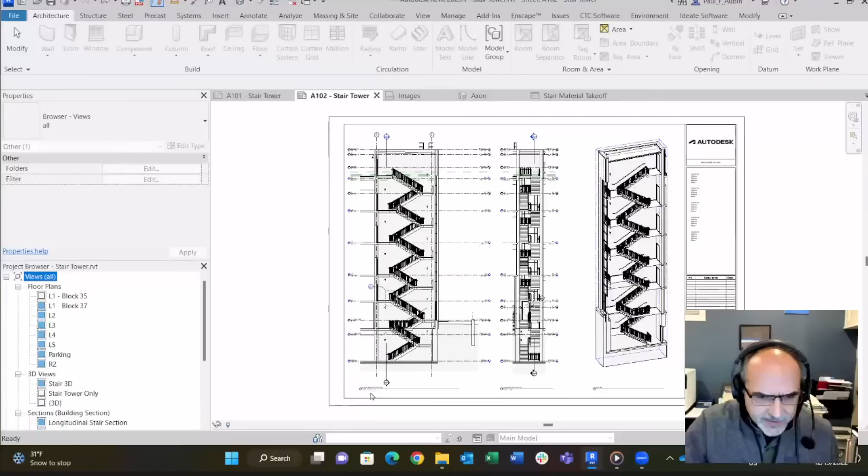Right now, we're looking at a sheet here that has, I don't remember what scale I set this at. It might be quarter. Yeah. Okay. So this is 1/4 inch. And I'm going to just zoom in a little bit here. Actually, let me do ZS. See if that works here. Because I already am in a sheet, right? Let's do it this way. Let me double click in the viewport. There we go. I was going to say, why is that not working?

Okay. So I know we're on the live stream, but on my screen anyway, that's to scale at 1/4 inch. And it should be telling you roughly what it would look like if we were looking at a PDF right now. What would be bold, what wouldn't be bold, what geometry you're going to see, what you're not going to see. Apologies for the hatch pattern on the concrete wall in the background there. I forgot to hide that. But actually that helps the stair stand out a little bit, so we'll just leave it.

But I think for this level of detail, for your overall floor plans, your overall sections, 1/4 inch, maybe even 1/2 inch scale, what you get out of this native stair tool with just a few clicks of the mouse, I think is fine. And I think in most cases is more than fine for construction document purposes, right? Here's the floor plans that go along with that. These are also at 1/4 inch scale, right? And I'll just kind of walk through them.

That's the lowest level, right? And then, going up to your first floor, your second floor, and it just sort of works its way up the building here, right? And then what you do in larger scales is you just draw a detail. Now, I hate to crush everybody and have everybody be all disappointed, but if you think you're going to click 4 times with the mouse, right? Because that's what it takes, right?

1, 2 for run 1, 2, 3, or 3, 4 for run 2. And if you think you're going to click the mouse 4 times and get shop drawings, then you've got the wrong expectation for stairs. So honestly, that's the lesson, right? In my experience, most people have this unreasonable expectation about what they're going to get from stairs for 4 clicks of the mouse, and they don't have that same expectation for other tools in Revit.

I don't know why we think that we're going to draw our walls or our doors or our roofs or really just about anything else, and have it be perfect and give us 1.5 inch and 3 inch to a foot details without a little bit of effort expended, and yet we somehow expect that out of stairs, right?

Now, this isn't to absolve Autodesk or Revit and to say stairs are perfect and there's nothing wrong with them. I'm not saying that. And railings especially. Railings definitely could use some love. Both of these tools could use some love. But having said that, is it perfect? Of course not. But if you have the right expectation going in, I believe you can get some pretty good results. And you won't have to make too many drastic compromises.

This is still a hybrid detail. I did not just throw the whole thing away and draw it all as drafting. If I click in here, this is the railing, right? That's a landing, so that's actually a floor slab. But somewhere back here is the stair. Where is it? There, right? These are the stairs. There's the stair. This one I covered up.

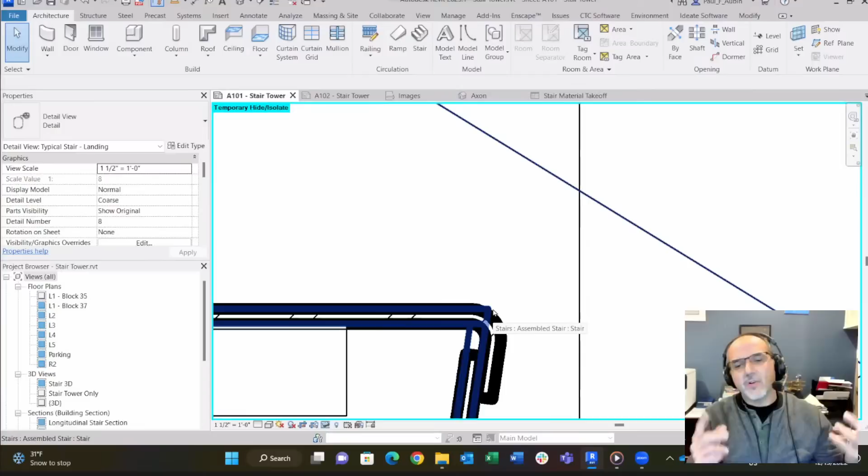Now, could I have done a custom profile? Yes. But you know what? I just didn't think it was worth it. You could make a custom profile for this nosing shape, and then you're going to really fight with it when they join together, because you'll get one part of it to look correct, maybe the nosing, but then the back part of the riser won't look correct, or vice versa.

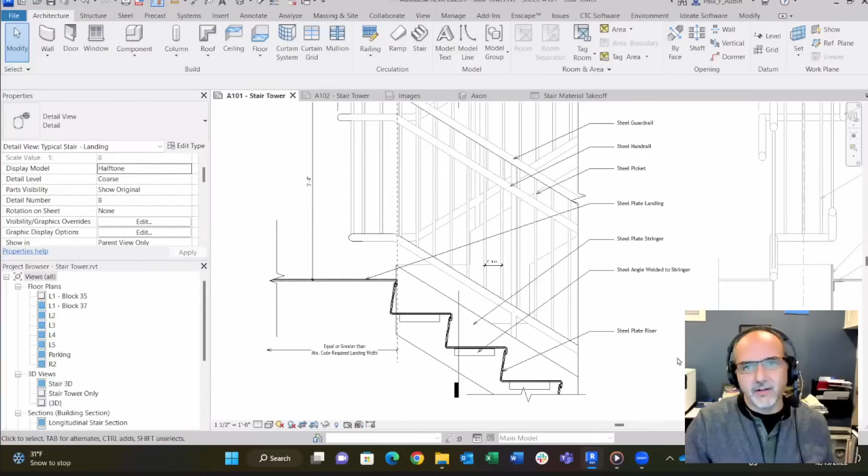So I just decided, it's one detail. This is a typical detail. It's one detail with an arrayed component, I said a repeating detail, but it's actually an array, sorry. And to me, production-wise, that was acceptable. Now, you might make a different calculus in your own work, but I wanted to show you the final result so you can see what's live. Another way we could do this is, over here for the model display, we could set it to halftone so you can see a pretty good amount of this is the live model.

But do you see here how some of the lines are dark? That's the line work tool, because when you have those rounded edges in 3D, they never render well in an elevation. But I was pleasantly surprised that I was able to just touch those edges with the line work tool and clean them up, and that worked just great. I didn't have to trace over them with separate lines. So the line work tool is a little nicer just because it's still the live geometry.

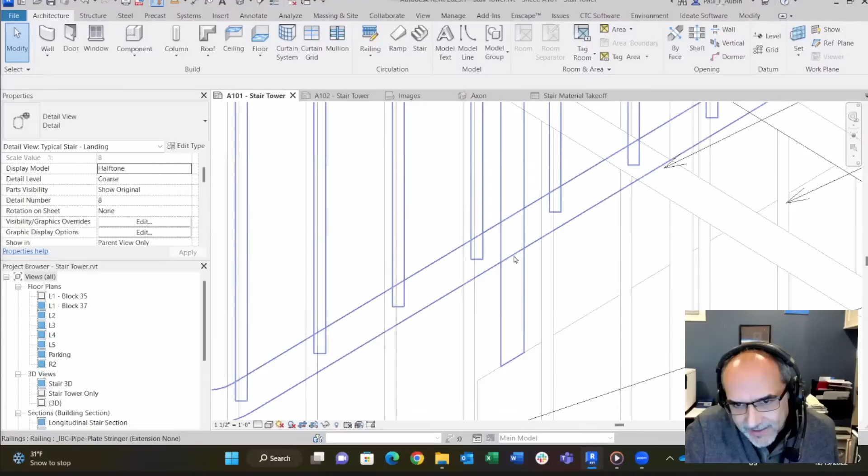You're just telling it to render differently. Here, right here, I'm getting this gap because railings don't do join geometry, right? So that looks like hell. That, unfortunately, you would just have to put some lines there if you wanted to take care of that. Some of that I just decided it's not bothering me enough to do that. But again, your results may vary. You might decide to do something a little bit different. But I just wanted to show you kind of a finished result.

Okay, this is all pushing the live stair as far as I think is practical, not possible. It's possible to push it further. What I'm calling practical, right? I'm trying to keep in mind that I don't want to spend my life building this stair.

I don't want it to take longer for me to build the stair in Revit than it would take to build it in real life, right? So I'm going to try and find a practical compromise between what the stairs do well and what they don't do well. And I think for figuring out how much room the stair takes, for figuring out the tread and riser ratios, for figuring out the special cases.

Like here, you can see in this one, there were two sort of first floors because at the street level there's a sloping condition. So this stair is in the middle of the building, about halfway up that difference in elevation. So you're actually entering the stair at one height over here, but to get out the exit door at the back of the building, you're at a different height. And so this stair is unique.

This one is unique. This is just a slab. Instead of using a landing or trying to do that with the landing tool, I just built it as a floor slab. And then this up here is a stair tower, because once you get above that level, the rest of it is pretty typical. And the floor to floor heights are largely the same. But even if they're not the same, that's the advantage of a stair tower, because it can regulate those different floor to floor heights.

So again, I was trying to leverage the tool for what it does well: the stair tower, navigating the different level heights. What it doesn't do so well, it's got some problems in the details, and it doesn't do the landings over on this side, which is really annoying. So all of these had to be floor slabs. I've tried to do a stair where you fake it out to get a landing in there, and I just don't like the results. So personally, I think just put a floor slab there.

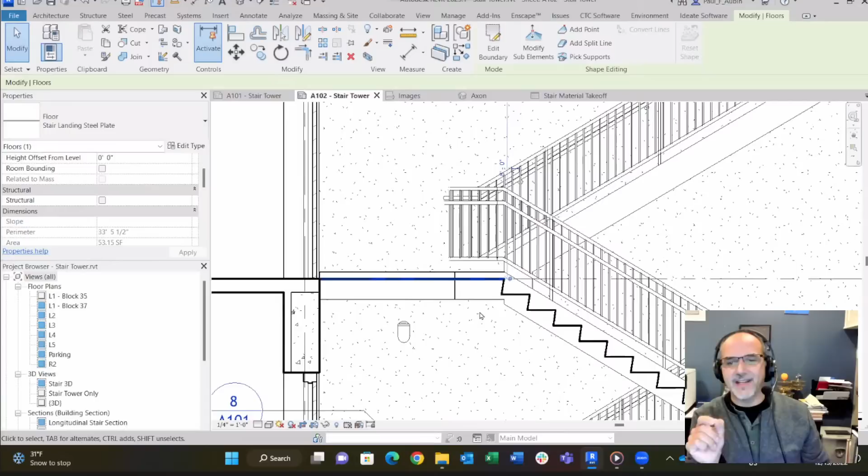Now, I was doing a metal plate floor slab in this project, but you could just as easily have a concrete floor slab there. And then, at an extreme, you might have to do something custom at that top riser. I've seen some details where the top riser is only like 2 inches deep, as opposed to a full 10 or 12 inches. In that case, the only way you're going to get the live stair to do that is to actually convert that run to a sketch, which is kind of a drag.

I really try and avoid converting the runs to a sketch if you can avoid it. I've got an example that I'm going to show you a little bit later, though, where I do convert it to a sketch because you have to. So if you need to, you need to, but it's not going to be as parametric when you do that. So I try and avoid that.

And I actually learned that by accident, because a client sent me a stair and said, I can't figure out what's going on here. How did he do this, and blah, blah, blah. And then I looked at it and I was like, oh, they converted this to a sketch. And then I realized why.

They had a concrete slab, and they just wanted a little 2-inch nosing for that first top riser, and then the regular risers from there. And to get that little 2-inch nosing at the top, if you convert it to a sketch, you could just move that one riser line and it's done. So I was like, oh, that's pretty clever, except that it's now a sketch-based stair, which I didn't love, but it got the job done.

So let me take a breath there for a minute and see if there's anything in particular you want me to dive into, or any questions. No, definitely. I think there are a couple questions, but as you're going through building this stair and showing some aspects of how you built it, I think you'll answer a lot of those. So we don't have to dive into those.

I just wanted to reiterate, because I think it's an interesting point that you mentioned there, of setting expectations for the stair tool, and for what you can and can't do with it effectively, or practically or efficiently, whatever word you want to use there.

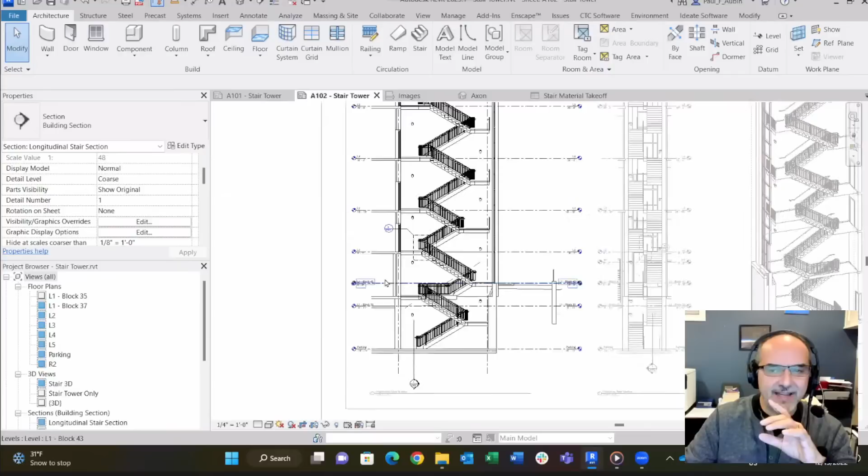I did the detailing too late. I would recommend you do it earlier than I did, almost right away, because when I started working on this detail I discovered I've got my railings a little bit wrong. This would come down and weld to the outside of this plate most likely, and I have it centered on the middle of the stringer, and that's kind of a problem. At this stage of the project, to go back and fix the model now, I toyed with fudging the detail. I decided to leave it for now because there's another pass, but it's an issue.

And what it left me with was a great lesson to share with the group: don't wait too long to do your detail. If you're doing a hybrid detail especially, you can start laying those out early. The second there's an element there, you could at least put a view, a section cut, a callout, and have it there. Yeah. And it starts to convey that information.

It makes you realize, oh crap, I got to go back and address that. Something is not right there. There's so many things for us to keep track of in a typical project that you just can't keep track of it all. So that's why make as many views as you can and have them ready to go so that you start to discover these things sooner rather than later.

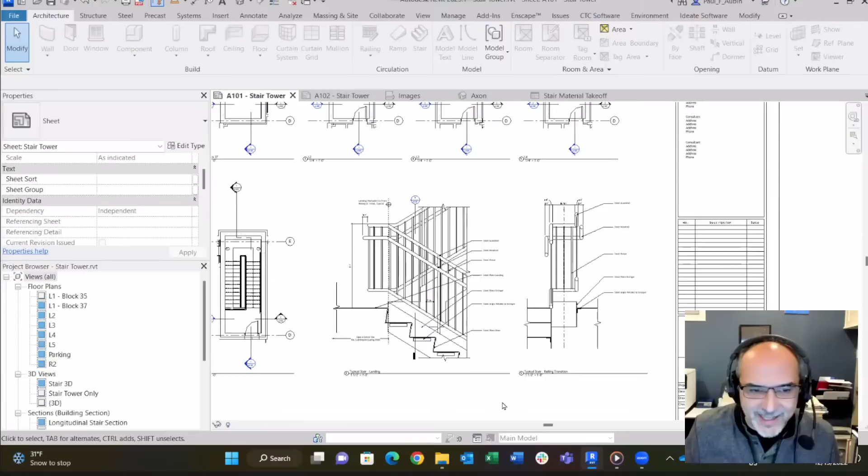So anyway, I decided before somebody in the chat says, hey, his railings aren't right, how are you going to weld that thing? Yeah, I'm gonna just come clean and say, yeah, I know, and I discovered it too late, and it needs to be fixed, but maybe later, right? Awesome. So anyway, let me show you a little bit about this stair type then.

So I've actually got a view here where I just isolated just the stair, right? And I didn't do anything fancy with this. I just literally selected the geometry and then hid everything else, right? So this view is purely for the purpose of showing you just the stair itself without any of the surrounding architecture. And I'm going to start with the one down at the bottom because it's not part of a stair tower, so it's easy for me to just grab it.

And this is called metal plate stringer, right? Pretty common egress type stair. And I tried to keep it as simple as possible in the type. I don't want to get super carried away with this stuff, right? So if you compare this to, I'm sure a lot of your viewers are familiar with the settings in a typical, like the 7x11 or whatever. Yeah, the typical 7x11 that's here. I didn't change anything there, right? So it's really here in the run type where there's some changes.

And then, I try and change the names. So prefix underscore is helping me identify in a long list of stairs. This one, it kind of bubbles to the top. So that's the only reason I did that. But if we edit this, this 1/4-inch tread, 1-inch nosing riser one, right? There's not really anything different here.

I think the only thing that's different from the out of the box is I changed it to a slanted riser because the out of the box one, this is unchecked, and then there's a profile, and I just took the profile off. Because you're going to get that sharp corner. Okay. They don't have a fillet option here. It'd be nice if they did, right? Like they have that in railings. Right. They don't have it in the stairs, right? So if we could just automatically make it fillet.

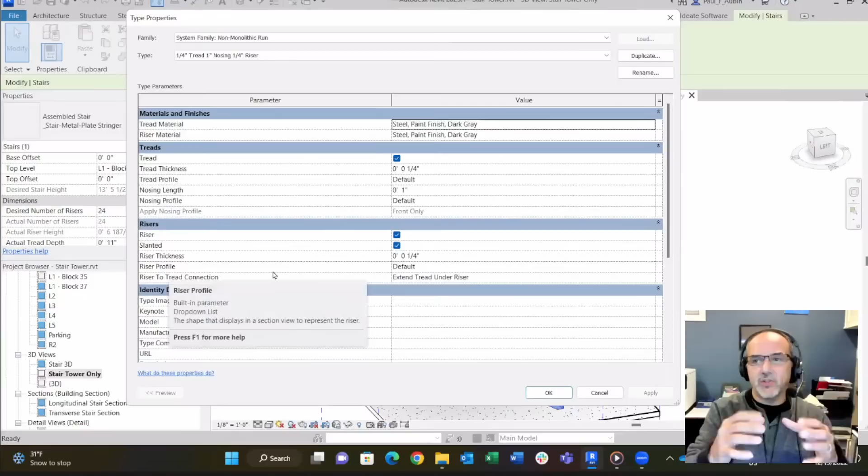But again, like I said, you might make a different calculus. So for those that want to explore, that's what you might want to look into is the tread profile, the nosing profile, the riser profile. Those might get you closer to the detail. But otherwise, all I did here was rely strictly on the materials.

It's 1/4-inch in both directions, and it comes at that sharp point, which is perfect for 1/8 inch, 1/2 inch, 1/4 inch, maybe even 1 inch to a foot. You probably wouldn't start to notice. It's only when you start getting into the large scale details that you would notice. And that's when you just add the detail component, in my opinion. So that's all that's going on for the run type.

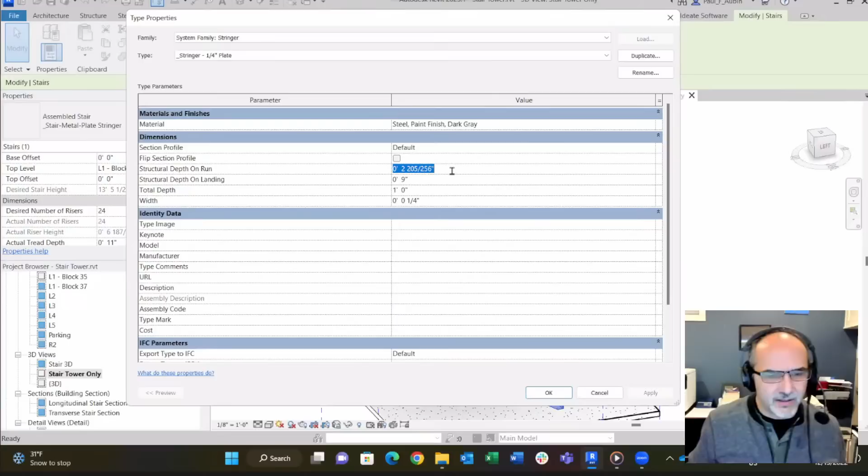For the supports, it's pretty straightforward because it's just a plate stringer, which means that the material again is just 1/4-inch material. I mean, there's really nothing to it, right? I don't really remember where this number came from, so I don't know if that was auto-calculated or if I did that, but I really don't remember. So I'm just going to leave it alone for now. And of course, I added some materials.

But that's it. That's the stair type. I mean, the stair type is super simple. Where a lot of the work really was in this particular content is the railing. Because to get railings, and it's really the extensions on the railing.

Let me see if I can find a good example here. Right here, right? Do you see how it... I know everybody was hoping I'd have some magic way to make it go around the corner. Sorry, I don't. This is a separate railing, right? I just deleted that. I'm going to undo. So I literally just drew a separate railing.

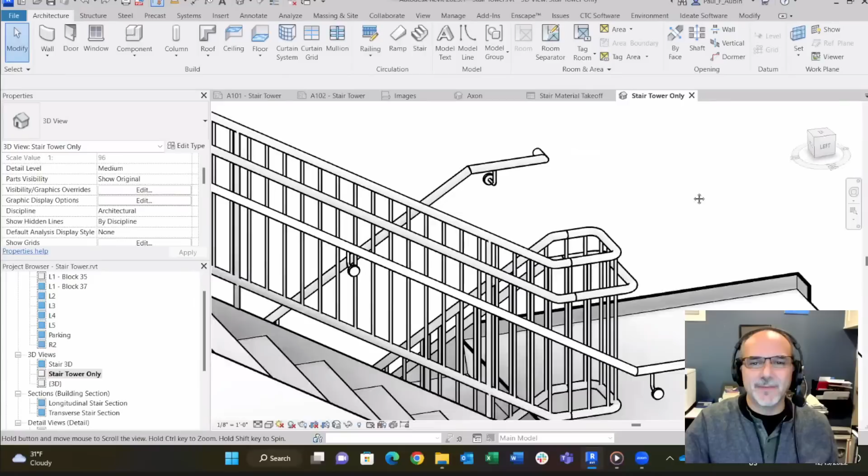Now, anybody who's heard me talk before knows I hate seams. Yep. So this seam does bother me. Yes, it really does. But compared to the agony that I would have to go through to try and do that as one continuous railing, I got over it. The other thing you might notice about this railing is I've got very few posts, because the minute you introduce posts into here, it starts becoming kind of painful.

So I decided I could live without the posts for my 1/8, 1/4, and even 1/2 inch scale views. And views that really needed to see the posts were probably zoomed in closer, which means I'm only adding 1 or 2 manually. You're not adding posts down the entire railing, right?

Now, some might say, well, what about Enscape? Well, if you're doing Enscape at your fire stairs, then maybe you need to go introduce your posts, right? And I do have a couple. You see, there are some here. But I'm not getting them in these areas here, because trying to get the railing to do it automatically was just becoming too painful. They do have corner posts, but it kind of messes up other things.

And so that was the decision I made: given what I was able to do without posts versus with posts, I decided to really dial back the posts. So I've only got the most basic ones. I've got one right there, right there, and right there. And I decided not to do posts around where it turns the corner. Again, your results may vary.

But to get vertical members like the IBC code calls for along your extension, that's not really a great example. Where's a better example? Probably at the top. Those have to be supports. Where is a good example? Well, okay, there is a little bit right here. You are seeing it right there, right? If those were balusters, they would stop here at this one.

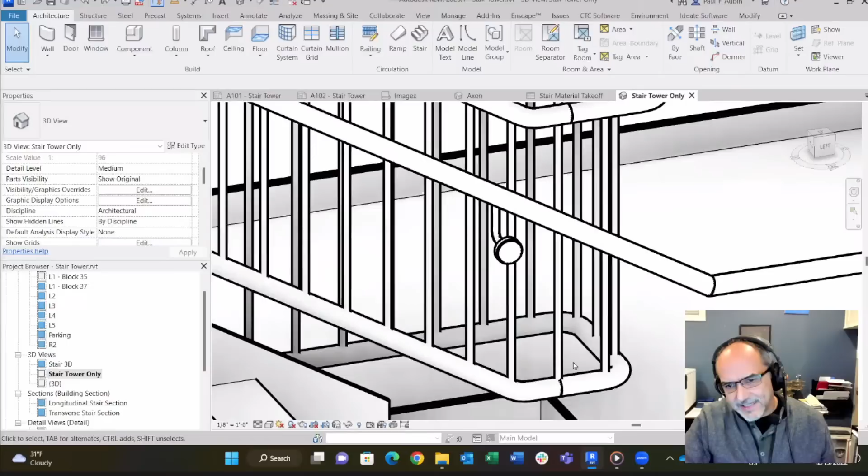To get it to go to this one, this is actually a support. And you see the little push pin here, right? That's a separate element. Supports only work on top rails and handrails. So if I look at this railing type, there is a top rail that I called IBC circular. Again, the underscore, that's my naming. That's my topmost rail up here at the very top.

Then I'm using 2 handrails, one for the actual handrail that you grab onto, that's a proper handrail, the other one for the bottom rail, this guy down here. This is actually a handrail. So this is a handrail, and this is a handrail.

Sorry, I don't have one of those highlighters. Zoom has that, right? I think so, but that's okay. I could do it for you too if you want.

Yeah. Okay. So this is a handrail, and this is a handrail. And this is a top rail. So that one is T for top, and this is handrail, right?

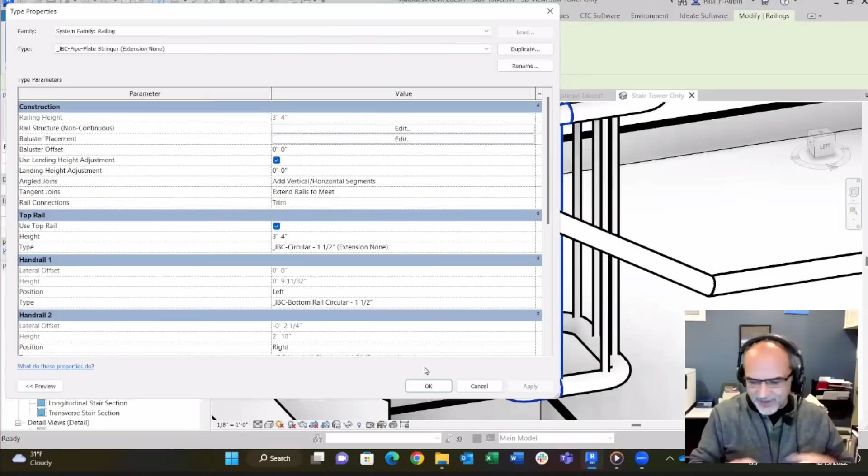Yep. Now I got to figure out how to erase all of that. I can't tell you how. It's somewhere on the Zoom controls. They're all drawings, and they go back to the mouse. Yeah. All right, let me close that. So, my good friend Nahama from Arc Intelligence has this little tool, I think it's called ZoomIt. I downloaded and installed it, and she's so good at the keyboard shortcuts for pointing to things. I'm just terrible at it. I can't remember the right shortcuts. By the time I find them, I make a mess of things, but I'm always jealous of her when she's presenting. But anyway, I digress.

So here, this one is set to left, this one's set to right. Okay, and that's how you can get this to work, because you can have 2 handrails, and what it was intended for is one on the left and one on the right. But you can take one of those and just pull the offset off of it and move it vertically, and it's basically in the center.

I forget which one of these. This one, I guess, right? My handrail 1 says 0 for the lateral offset. That's my bottom rail. So even though it's technically in the left position, it's 0 offset. So it's sitting right at the middle of the railing. And then the right railing, the one that's actually set to the right position, has the 2 1/4 inch handrail offset. And that's the one that's placed, you can see here the height, at 2'10", right?

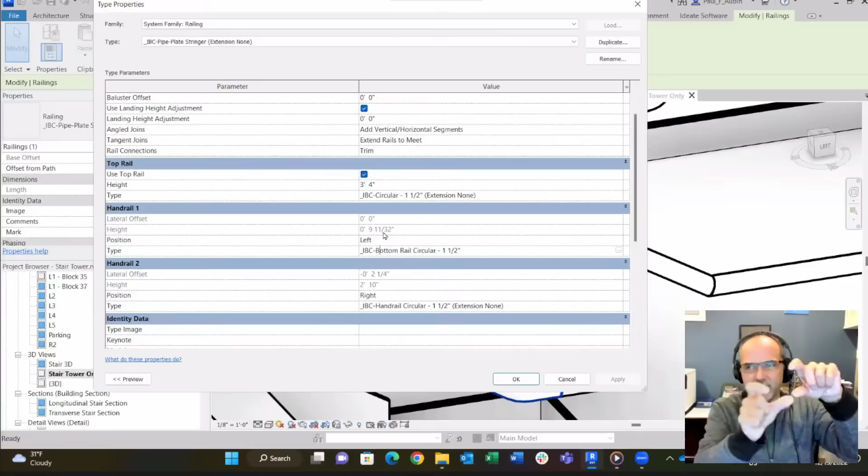Now, the height of the bottom rail, I just got it as close as I could to what the code called for. It's just a lot of trial and error to get it, because the way the code measures it and the way that Revit measures it aren't quite the same. So I got it as close as I could. And again, when you're placing your dimensions in your detail, you're going to verify those things and make sure they actually match the code. And if they don't, then that's when it might be time to either edit your type or fudge your dimensions, right? Anyway, that's what I'm using here.

So otherwise, the rails themselves are super simple. Now, I don't remember which one of these has the supports. I think it's the bottom rail. So, yes. So there's the pickets right there. And all that is a family that is just a circle extruded, right? I don't remember if I did it as a sweep or extrusion. I tend to use sweeps so that I can edit the profile. And then, of course, the spacing is 4 inches to match code. But the nice thing about doing it with a support is the pickets continue through the extensions, right?

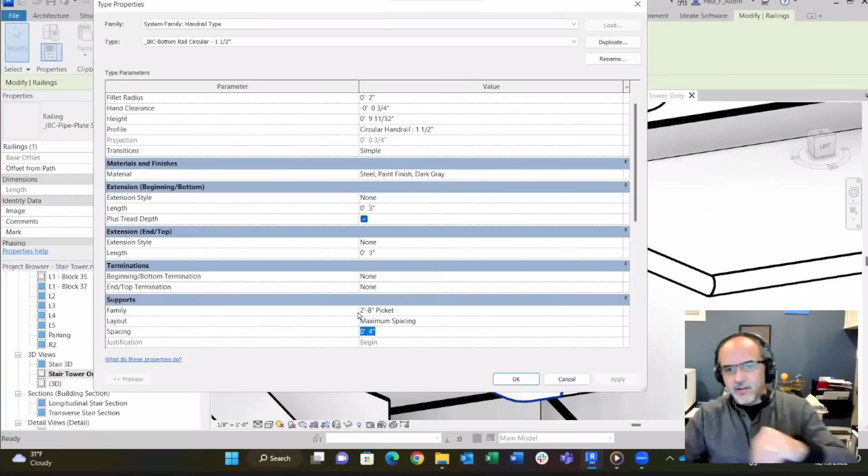Now here I'm only extending 3 inches, and that was just because I was going to draw that extra piece manually. But like this handrail here, that one actually extends the full amount plus a tread, so the more traditional thing that you would do, right? But here I'm kind of doing it manually. And I forget how I arrived at 3.

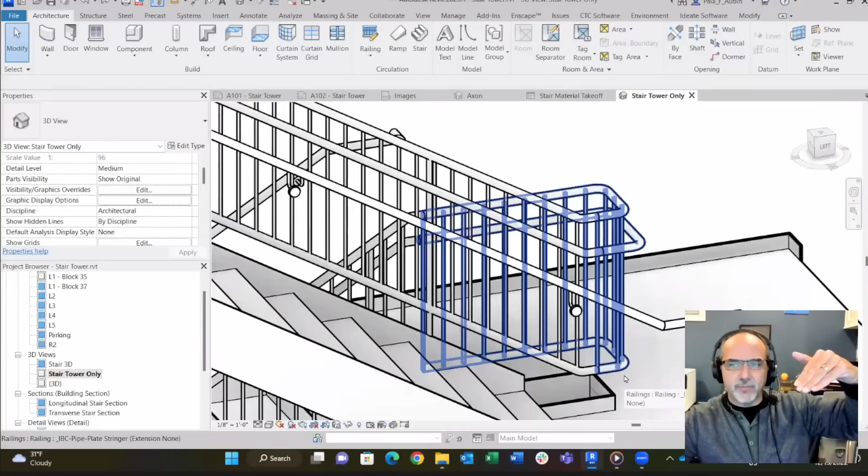It was, again, some trial and error, because if you didn't extend it at least a little bit, then it doesn't flatten out. And I think because 2.5 was my minimum, 3 inches got me past the minimum and it flattened out properly. Otherwise, it just kept going at the same angle. And I wanted it to go at an angle and then flatten out. And the only way I could do that is to let it extend some. So that's where the 3 inches comes from.

No, that's awesome. So your balusters for the stairs are all supports, right? All of them except for these posts. The posts, then the balusters in between. And in order to make that happen, you have to do that handrail trick you're talking about, right? That's part of the reason why you're explaining handrail 1, handrail 2, because otherwise the supports wouldn't work the way that you're thinking, which is kind of neat. That's really cool. And that's just so that the baluster with the extensions is controlled better, right?

And I think a lot of people struggle with that, because the code calls for that. The code says you have to continue those vertical members along the extension. And when you use just the out of the box baluster and rail tool, when you pull those extensions, just the railing extends and it stops the baluster. And then you're always trying to figure out how to meet that gap, sometimes splitting the railing, doing all kinds of stuff to try and get that to work. So that's really neat.

I wanted to reiterate that just so everyone followed why you ran through that, because the support tool, which I believe was designed for the wall supports, wasn't designed for these things. Yes. So you're taking advantage of that tool and not dealing with the damn baluster spacing. Actually, I think these ended up being the out of the box ones, not mine. So mine are slightly different. Let me see.

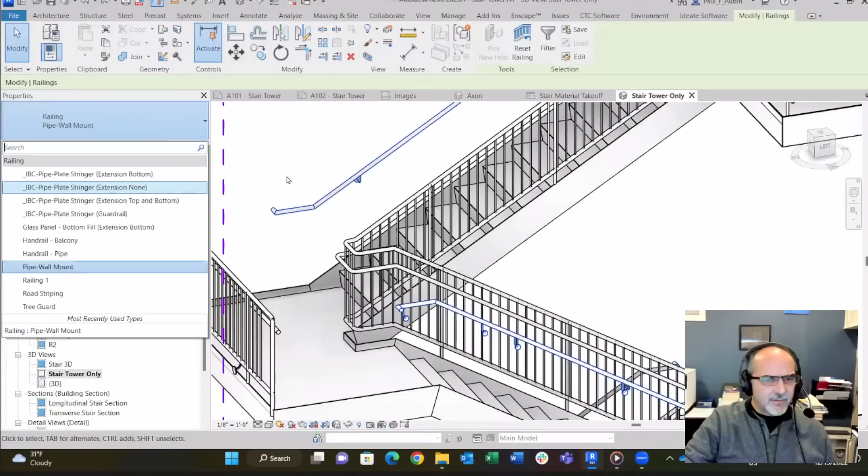Maybe I didn't load them in. Mine were slightly different because I like the smooth, right? So when you're in a railing, there's a setting for that. It's buried somewhere. Let's see if I can remember where it is. It's probably in here, right? The default join can either be a miter or fillet. Right. Fillet, and then you can put a radius.

And it just makes smoother geometry. Again, I like fewer seams. I like smoother geometry. So you see how it's doing nice smooth and going around the corners here. And that's part of the reason why I needed the 3-inch extension down there, right? To get past that fillet. And then this one, the same thing with the wall return. It would do a nice fillet there if you use that.

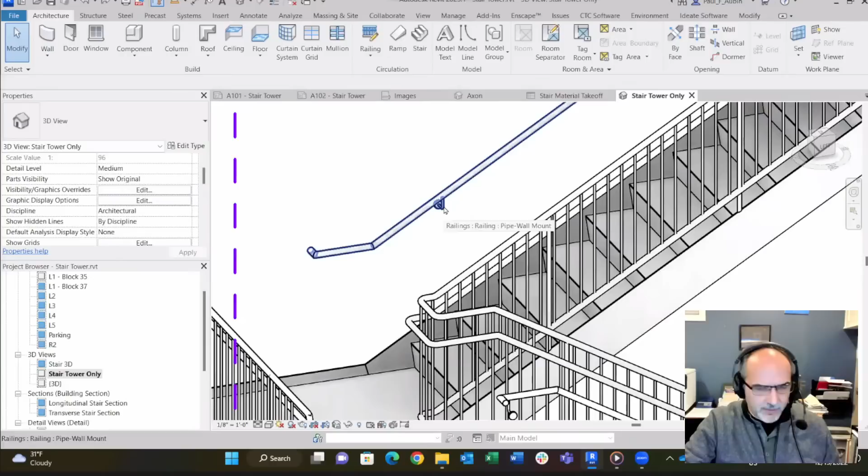So this is theirs, I think, because those aren't supports. That's actually a baluster, I believe. So that's like the old school one. That's snuck in there somehow. No, maybe not. Oh, hold on. Maybe you just couldn't select it for some reason. Yeah, maybe it's just not letting me select. Oh, yeah, no, it is a support. Yep. Okay, so there it is. So yeah, that's traditionally how you would use the supports.

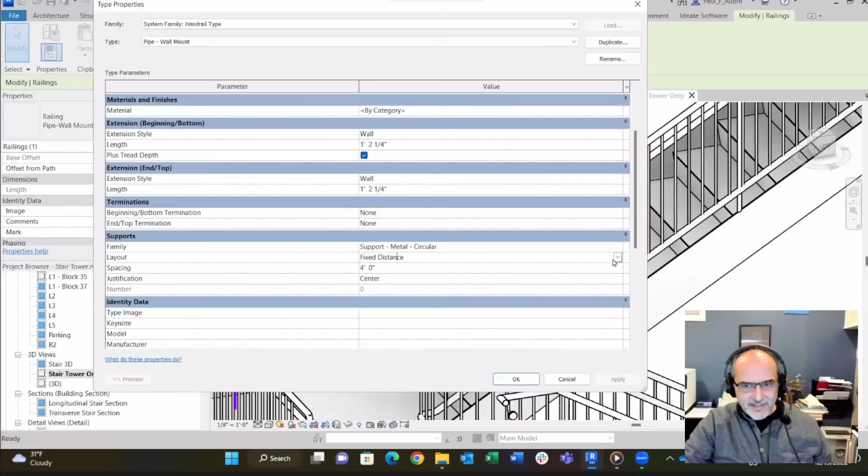Right. Is to either attach to the posts, because there is actually a setting in there which is kind of nice. Like if you want that same kind of little escutcheon plate and angled support to attach back to the posts on your railing, then one of the choices here is to do that. So the fixed distance is one of the options, but you can say align with posts, right? Yep. So if you align with posts, it'll just put one at every post, which is kind of nice on a stair. But then it doesn't know what to do along the extensions, right?

And then these things, you always end up with these in kind of weird, bad places. And sometimes you can select them and unpin them, but sometimes the push pin is mysteriously not there. I think it's because this is in a stair tower. Yeah. Right? And when it's in a stair tower, it just doesn't behave. So down here, right, I should be able to unpin. See? So I could unpin that, and I could actually move that support, which is not great, but it's better than leaving it in a really bad spot, right?

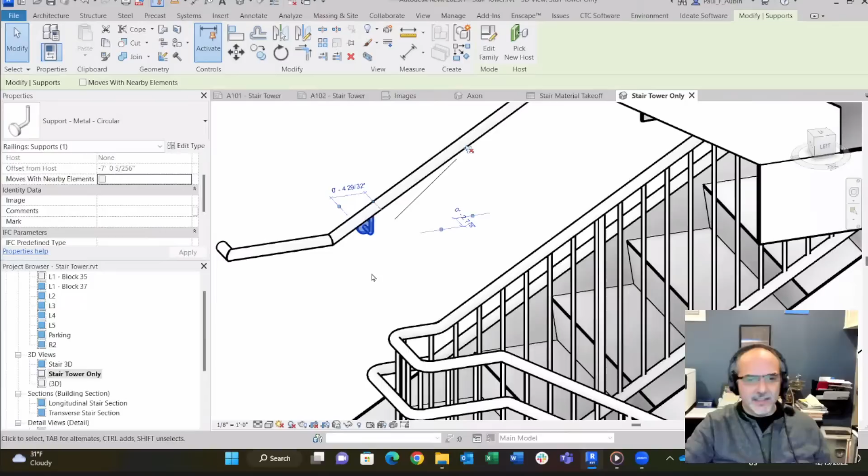So if I want one of these here, what's not great about it is having to do that over and over again in lots of places. But the fact that you can do that, you can even go to the component tool and you can add a support, a custom one, which is another really nice feature of supports. You can't add a baluster manually. Right. But you can add a support manually. But again, stair towers seem to break all of that, so again, we're talking about the good and the bad here.

So there are some legit complaints of stuff that just does not work in stairs and railings, and that's definitely one of them. So some of those things, like I said, you just got to temper your expectations and work with what does work and just kind of try and live with what doesn't. So now you've got that, that's great, and I think even just that railing setup will be a huge eye opener for people.

So maybe show everyone what that looks like before you fix some of the end rails and stuff. Maybe just draw a quick stair, just so... I'm sure everyone's dying to see that. But I'm curious because now with this sort of extension or this handrail 1 and 2 approach with the supports, I'm curious to see how it pans out too, because it makes total sense in my mind, which is awesome. I need to figure out where you're gonna draw it. Yeah, I gotta find a plan here. All right, so let me

just make a new... And Michael in the chat said, to get posts where you want them, you can split the line, add a reference line, align lock the ends of the path to the reference lines, and dimension to the reference lines. Yes, right. That's exactly what I'm saying. We don't want to do, and this is what it's helping you.

But without supports, that's what you do, right? In order to try and get that baluster to end at the end there, right? But his comment is great, because you and I are saying, we don't want to do that if we can avoid it, right? But sometimes you can't. Yes, sometimes you can't. Sometimes the project calls for it. You need that level of precision in there for XYZ reason, right?

And again, when you're balancing, like I wish I had a pair of scales here so I could just use it as a prop. But when you're weighing the pros and cons, if I do it this way versus if I do it this way, you should always be asking yourself, am I going to get more benefit out of this than the amount of effort I'm going to put into it? Right. And if not, then you should step back and say, well, maybe I shouldn't do it that way. Right. That's all I'm saying. I'm not saying that anybody's doing it wrong if they do more detail.

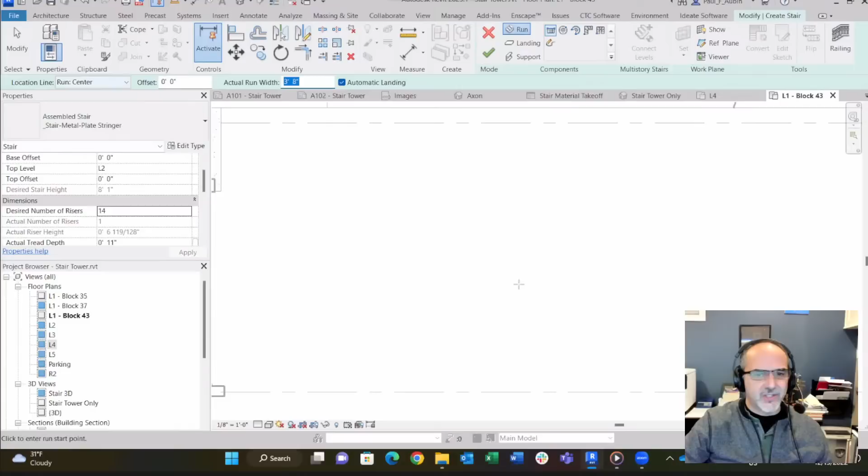Run width 3'8". That's fine. That's typical. I'll just draw it from the center because I'm off to the side in empty space here, right? I'll do about half of it. Let's see, 7, and then we'll do the other half, right? Now, if you just do this, of course, I'd have to have thin lines to see because that's only a 1/4 inch thick, right? So if I just did this, I'm going to get the really nasty kind of tight railings.

Anybody who knows me and saw me just cancel now. I'm doing a demo. I'm not doing a real project. No, because I always give people a hard time about that. Yeah, of course. Click cancel, right? So I know somebody's there saying, "Hey, he just canceled." Right. Yes, I did because I don't want to save this on purpose.

I'm gonna overtake my 3D view here with this guy, and we can just kind of see what this looks like. All right. So I have it default to this crappy railing, right? Because I find the one downside of using supports is sometimes when you switch railings, the supports misbehave. So I always like to have this railing that's nothing but a rectangular handrail in the file because it's almost like a reset. In fact, that's probably what I should call it. I call it Railing Reset 1, but I should just call it reset.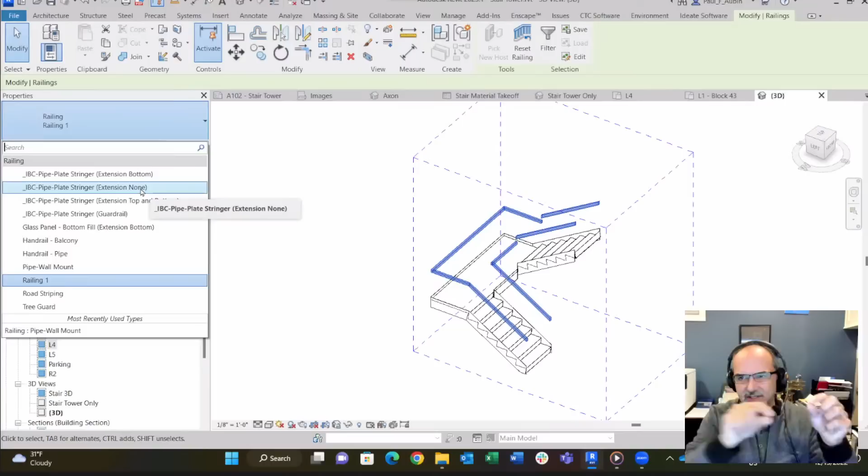I don't know why that works. But like if you try and switch from, say, a glass panel railing to one that's using the pickets, the pickets will almost always misbehave. But if you go to this one first and then to the pickets, it seems to work fine. I don't know why. I really couldn't tell you, but it's just one of those weird little things. So I've got actually different versions. The one that I was showing you in the other one, I think was using extension. I called it none, but really it's just that little 3-inch extension. Right. I'm going to do the top and bottom one just to show you what it looks like if you just had a 1-story stair here, right?

That warning was telling me I had duplicate elements because sometimes it'll put an extra picket somewhere right on top of another one. So I just ignored that. Ideally for a clean model, you'd want to get rid of those duplicates, and you can actually tab in and find them and delete them. But I just ignored it for now. But they're usually right here. Like there's one right there, kind of buried in there, and there's another one right there.

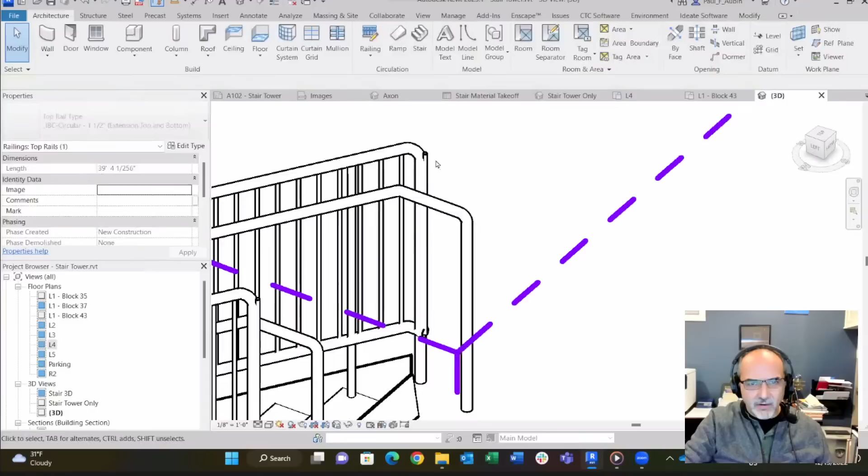There's one right there that's a problem, right? So if I tab into that, unpin it, you can just delete it. Which you can't do with balusters. Can't do that with balusters, yeah. So that's a bonus to supports there for sure. Yeah, it's a lot of bonuses to supports, right?

But you can see that mine is using the rounded. I just like the rounded better. But do you see how kind of crappy it looks right here, right? So usually for me, unless you're modeling an existing stair and this is what it is, it is what it is, right? For these really tight, crazy angles, you're going to have very little control over that with the default railing tool. So that's a place where it's doing its level best here to try and give me what it thinks I want.

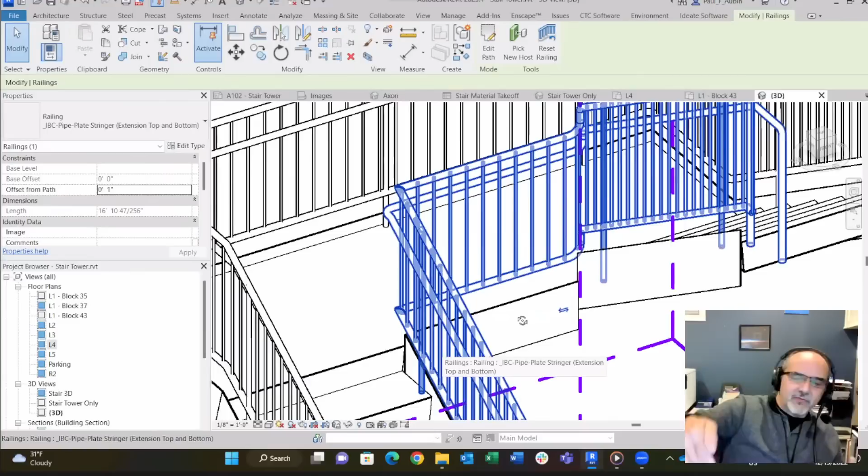But it does look a little crappy, and I do have a disconnected sheared connection there. That's just because I don't physically have enough room to get around the corner, right? And honestly, if you go look at a railing like this in a real building, it probably has some really crazy angles and some other things that they did just to fit it into that space. So it's probably got similar problems. It's just not quite so janky looking as that, right? So if that's what you've got to model, that's what you've got to model.

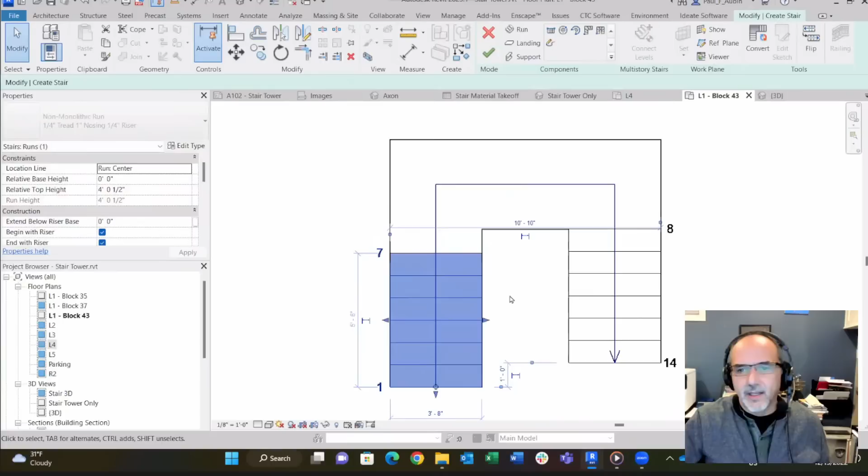But in my case, I've got room, so I'm going to just make a quick adjustment to the stair. And the easiest way to fix that is to edit your stair, and don't mess with the landing. If you mess with the runs, it will automatically adjust the landing, right? So I'm just going to take this run and move it with my move tool 1 foot. And then this one, the one that's going down, I'm going to go a little further. I'm going to move that 1'6". So that gives us a little more room to get down to the flat area before we turn the corner.

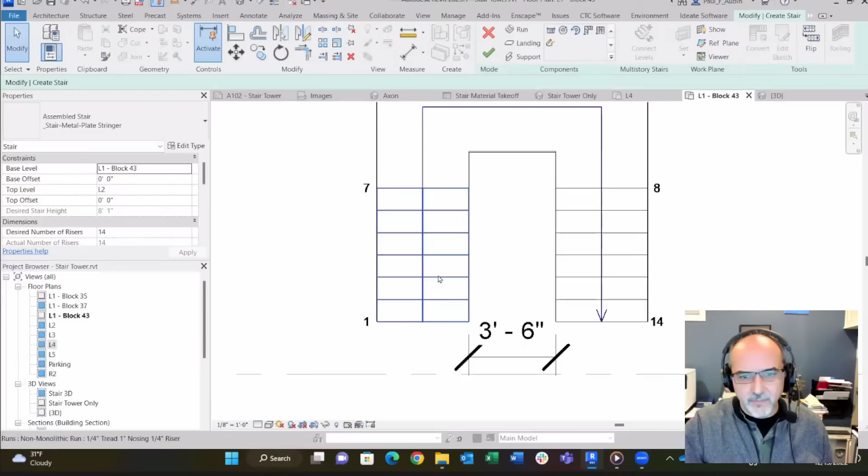Now, if you want these lined up, then just go ahead and line them up, right? So they can both be 1'6". That's fine. And, of course, the other thing folks want to know is you can put dimensions on all this stuff. Just make sure you're dimensioning the runs. The runs drive the stair. So the supports and the landings are a consequence of the shape of the runs. So just make sure when you're dimensioning, it says runs in the tooltip. If it doesn't, use your tab key. And then, let's say I wanted that to be 1 foot, right? You can just do that dimensionally. So all of that you can do.

And when I finish this, let's see, I don't recall which view. Oops. That was not what I wanted. I wanted Control Tab. There we go. My views are going underneath Zoom, and I can't see them anymore, so I just decided to do Control Tab there.

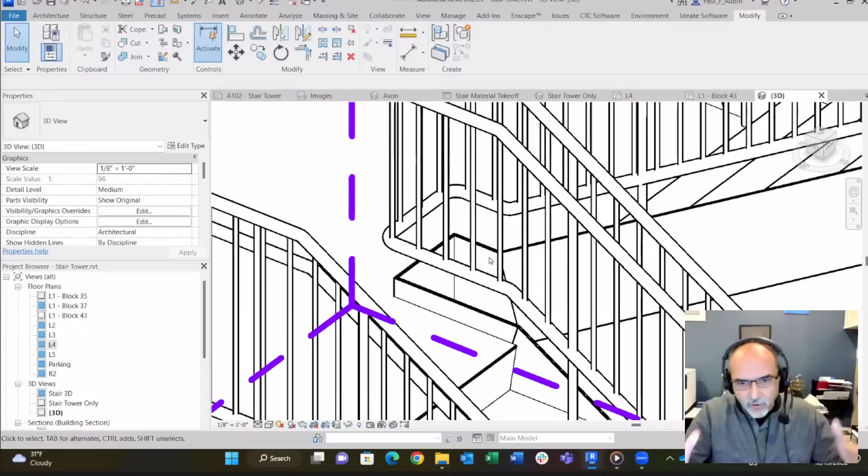But do you see how much nicer that looks now? Because we've given it plenty of room to turn the corner and to make the proper transitions, right? So if you've got the space to work with, I think what you're going to get from the automatic stair and railing is going to be quite acceptable, likewise with the supports. You see this piece of support before, when it was jammed right up against it, you couldn't even get a support. You get a little broken triangle in there that really looked kind of bad. So you can go a long way towards getting acceptable results by just making some of those really simple adjustments there.

Now, that's one of the reasons I don't like to go to sketch too early. Like for the example I was talking about where they wanted the 2-inch return at the top here, right? The only way you're going to get that is to edit the stair. And so that's this one. I would have to take this, and let me get Zoom out of the way, it's covering everything. I would have to convert it. Now, when you convert it, it says you're going to lose your automatic behavior. But now, I could select this and edit the sketch of it. And then you could put in a line here at 2 inches away. Well, don't want that to be a boundary line.

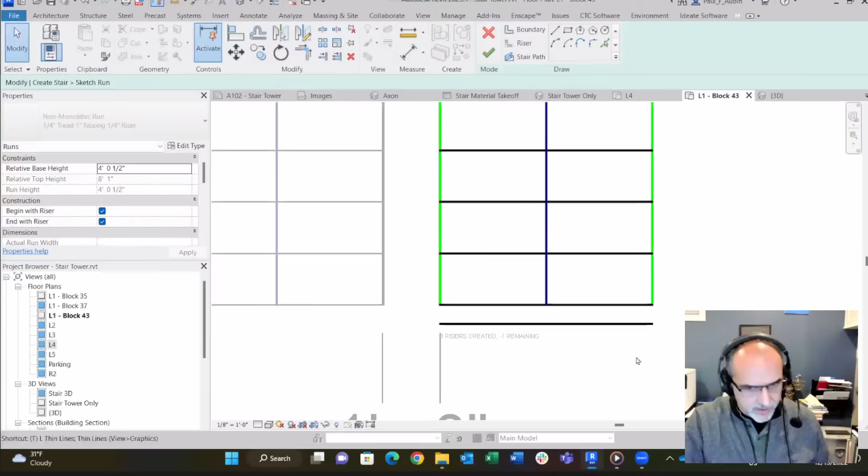Riser, right? You could put in a line here at 2 inches away. Now, I technically just added a riser, so I don't know if this is going to get all cranky with me or not. Probably, but that's okay. Let's see. Oh, actually, 14 plus 1. Okay, good. It didn't get really mad at me, which is nice. And then you turn off the end with riser.

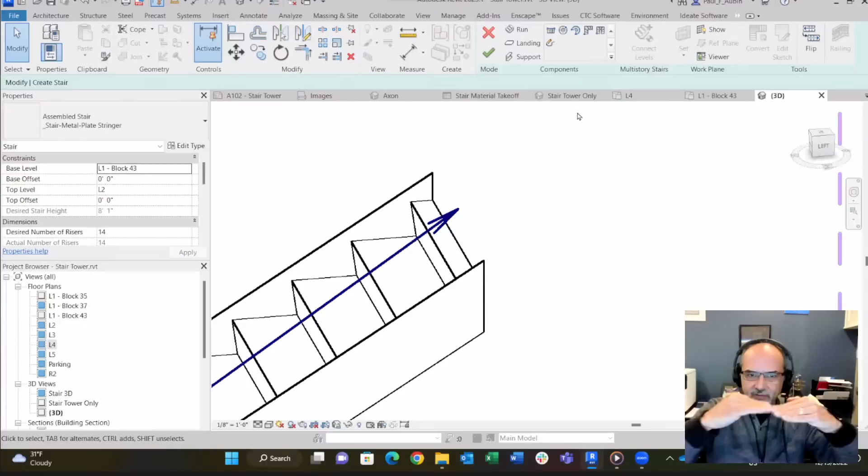Right. So actually, since you brought that up, somebody did ask a question a while ago of when to use end with riser and when not to. I think it just depends on the connection that you want to the level above, right? Exactly. So here, do you see how I've got this little short tread now, and then you would bring your floor slab in flush with that, right? So the floor slab would continue right from this point.

But unfortunately, this run is now a sketch-based run, and there's no way to unsketch it, right? You'd have to start over again. So if you decide to go that route, it can be effective, but there's no turning back, right? So just keep that in mind.

Somebody actually asked if you could show what that support family looks like. I know you said it was pretty straightforward, but maybe just opening it up. Or it's not a family, it's just the default support. It's literally just a 1/4 inch. So you just do edit type, duplicate on your... The vertical support, the baluster support thing. The railing support, sorry. It was off topic, but I figured we'll hit it. I haven't actually looked at this one myself in a while, so we'll rediscover it together.

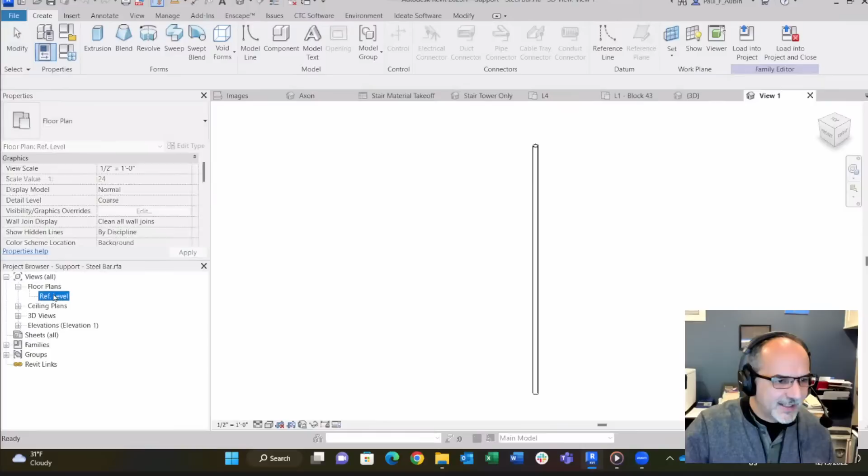So let's see what we got in the floor plan. So this is the out of the box template. It has a reference plane over here for the hand clearance. It looks like I ignored that one and I just drew it here. I just did a simple extrusion. I did make it too tall and I put some voids in there. If I recall, probably front view. Or maybe it's left view. There we go, here's all the dimensions. So they had put their dimensions in left view, so I just stuck with that.

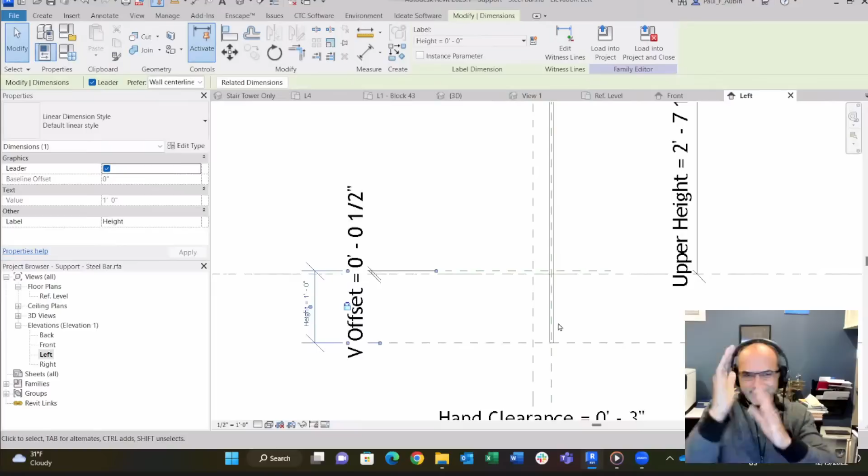So I have two different parameters here, right? This height here is currently set to 0, but if I made that like 1 foot or something, I just made it so that I could project it down or up, because sometimes when you load it in, you just need a little more or a little bit less. And then I also did a vertical offset. Vertical offset is moving the bottom, but I don't know why I left it called height. That's a dumb name. Height is actually the opposite of height, because it's going down. That's projecting down from that location.

And I built this literally years ago, so I can't remember exactly why I thought it was necessary to have all three parameters, but it did feel like it was. I would imagine it's probably kind of like the baluster family, where you want control off that reference, because that reference isn't necessarily a floor anymore. It becomes different things, so giving yourself the ability to pull it up or down depending on what that bottom rail, handrail number 2, ends up being.

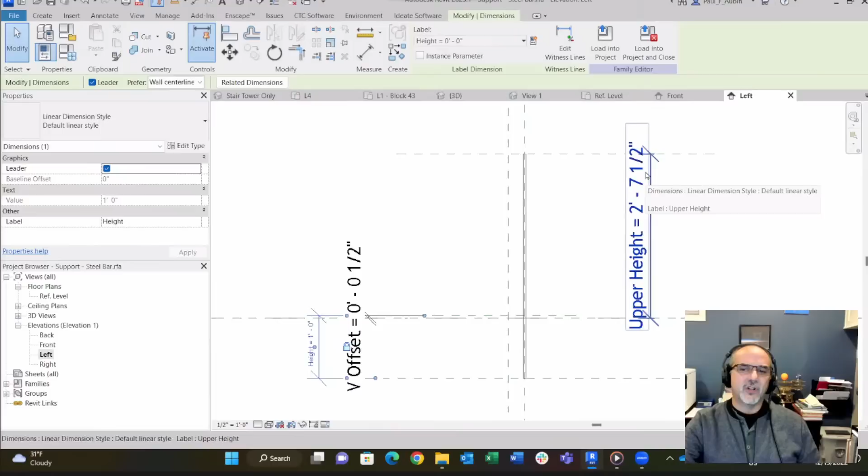But I know this one for sure was simply because it was easier to have the parameter, because when the slope of the stair changes, sometimes it affected that. So then you could just do it with the parameter without editing the family. The bottom one I can't quite remember why I needed, but it's probably the same thing. There was probably a little gap that showed up, and I was like, I'll just put a parameter there and it'll fix it. And so that's a stair support template out of the box, right?

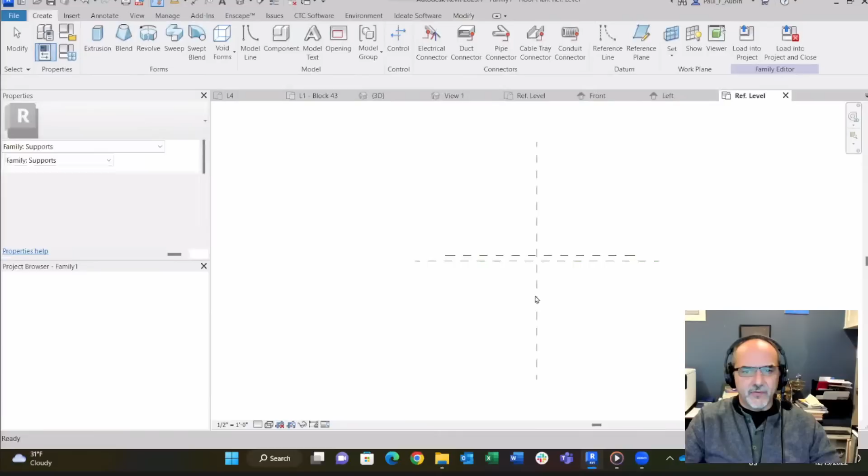Yeah, the template that I started with is called support, right? Is it called railing support? Railing support, right there. It's this one. Perfect. So when you start that, you have the reference planes there, and you probably even have some of the dimensions there, or at least reference planes. Right. So that's why they called it height. They called it height. There you go.

All right. Okay. See, I'm absolved. All right.

So I kept their parameters and I added a couple of my own. Got it. I added the offset and I added the height. Well, again, now it makes sense because they're using the ref level as the location. And if you're thinking of that as a little angled support with an escutcheon plate to the wall, then height is where that touches the bottom of the railing.

And then the reason their height goes down is because that thing angles down and then back to the wall, right? I didn't want mine to go down. I wanted mine to go up. So that's why I needed a reference plane up in this location and a different parameter for that. I suppose I could have reused height and made it go the other way. That's it. But yeah. Anyway, cool.

So yeah. Again, I haven't been in this family in a while, so thanks for bringing me down memory lane there. Yeah, no, that was great. That was helpful, I think, for people, because I think that's a great tip.

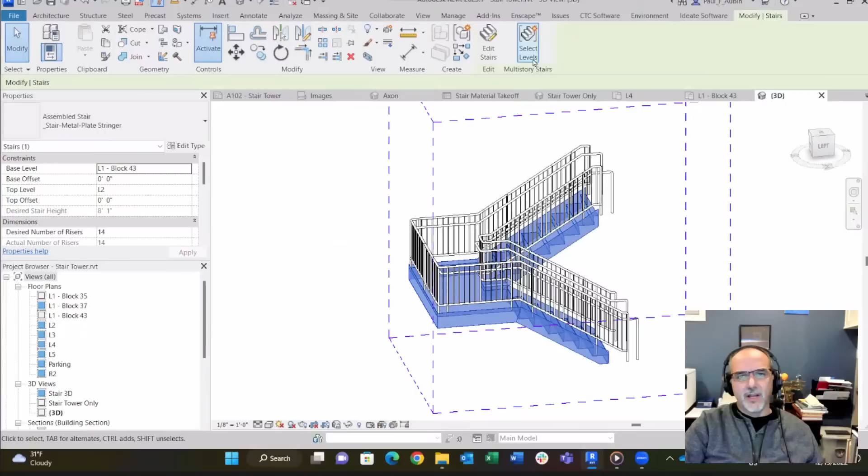All right, let me close that one, and that one, and then so we've got that, and then if you want this to be a stair tower, I would need a section through here, and I don't need it to be that deep. So you would just select this, and you'd say select levels, and don't want the mezzanine. Let's just do levels 3, 4, and 5. Finish, and it'll just adjust.

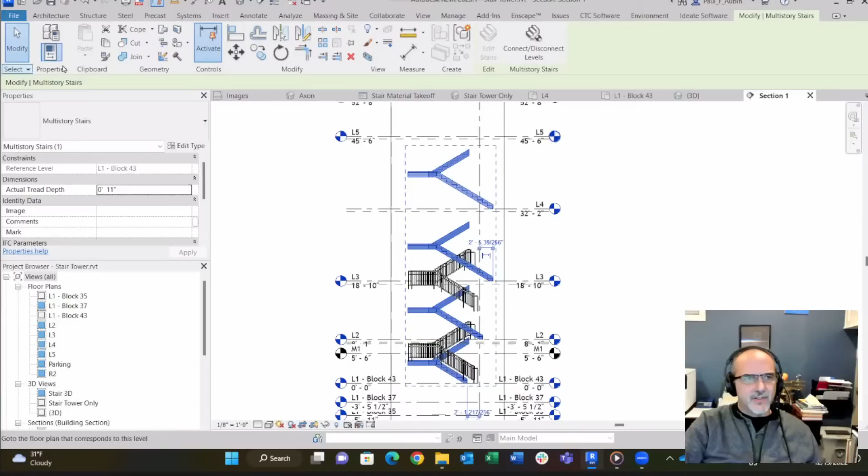Yeah, it'll try. Like that one is a little strange. I'm not sure what happened there. Probably because my sketch-based top. Yeah, your sketch-based top, and you're using that shorter. That's exactly why. Yeah. No, it's the sketch-based top is what messed it up. The 2-inch thing, yeah. Yeah, because you see how it's not able to adjust those runs. So I'm going to undo that, and I'll show you. I'll cancel, and I'll show you what would have happened if I had waited to do that.

Right, like so this one, edit stairs. I think I can delete this and just add it again. Just that sketch, because you only converted that run to a sketch. Exactly. Yeah. I think that will work. Let's find out. Okay, that seems to have worked. Let's look at it in 3D just to make sure. Seems okay. Now let's try doing a stair tower. So again, that's a clever workaround, but I don't love it for those reasons, right?

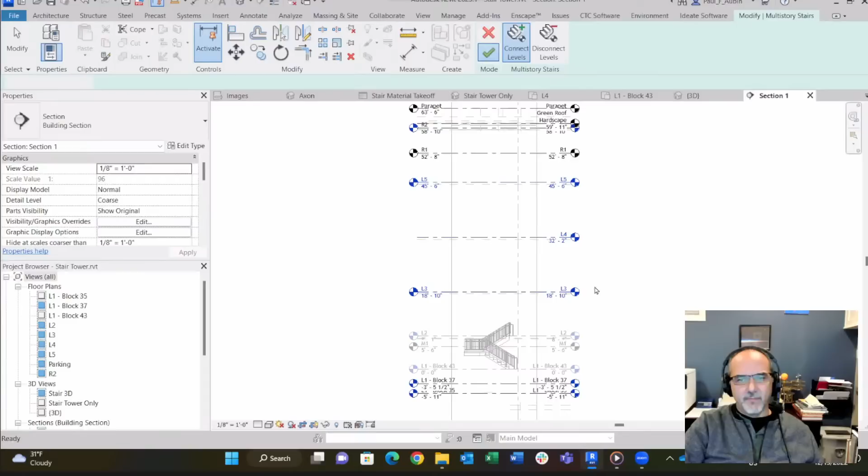See, that worked much better, right? And you can see here that the height between level 2 and 3 is different, and so the 3 to 4 and 4 to 5 are the same. So this one, you ended up with, I don't know what they call these, but they're like a stair group or something, right? A stair component of some sort. Yeah. This one is different, and this one down here is different because those floor to floor heights are different. I mean, it's the same basic configuration. They're kind of trying to do half and half for you and give you the same rough setup, so it does its best to kind of match what you're doing, but yeah, it's going to be a little different.

And then so what that means is if you edit anything about one of these two, it'll apply to both of them, but it won't apply to this guy down here, right? So for folks that have never seen that, let me show you what that looks like. So I'm going to do edit stairs, and I'm just going to take the landing here, and let me just hold my shift key and my nudge and do that, okay? And then it went out of my cut region there, but we'll fix that in a minute. And that is just because my section wasn't big enough.

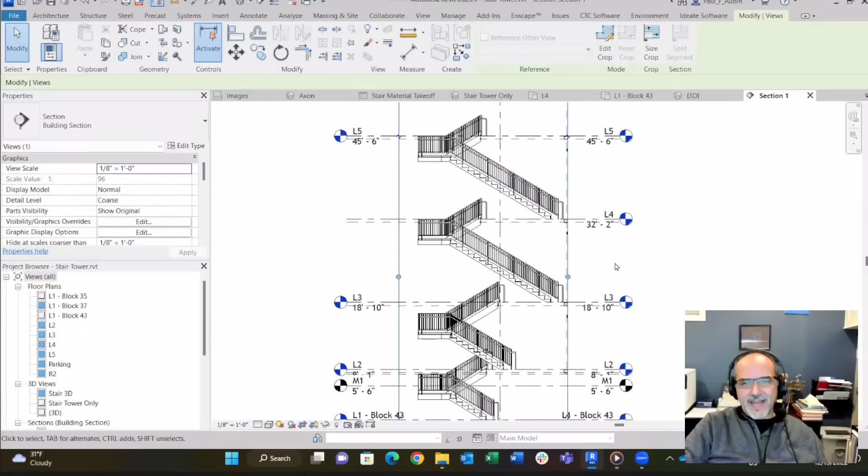So do you see how that change only applied to the top two, right? Because those two were the same height group, I'm going to call them. Yeah. But these were different height groups, so they don't. Now, again, that's not so much is that correct? Is that not correct? It's just know that that's what it does. And then if it does, you can plan for that.

My experience with stair towers is once it's in a stair tower, it's a little difficult to kind of back out of that. So if you're not 100% sure that you're ready for it to be a stair tower, wait, you know, work on the lower floors for a while, get the stair kind of where you want it to be, and then turn it into a stair tower later.

Now, if the stair tower is not working for you, you can always just do a plain old copy and paste, but then you're going to have to adjust each height group yourself manually. The nice thing about the stair tower is it adjusts to the heights automatically, which is kind of a nice feature. So yeah, and thinking about it that way, the benefits are probably what you showed there more than anything, because in theory, as long as the top and bottom of the stair are set to a level, if you move the level, regardless of whether it's a stair tower or not, they're gonna adjust.

But I think the key aspect of what you're showing in this tool is, I think you mentioned at some point, it's all driven by the run, right? Respect the run. So hopefully people can see there's so much value in keeping them as the stair component, as opposed to converting to sketch, because they become so much more flexible when you adjust the size, the length and stuff. And the second you go to sketch, you're losing that flexibility. You're going back to 2008.

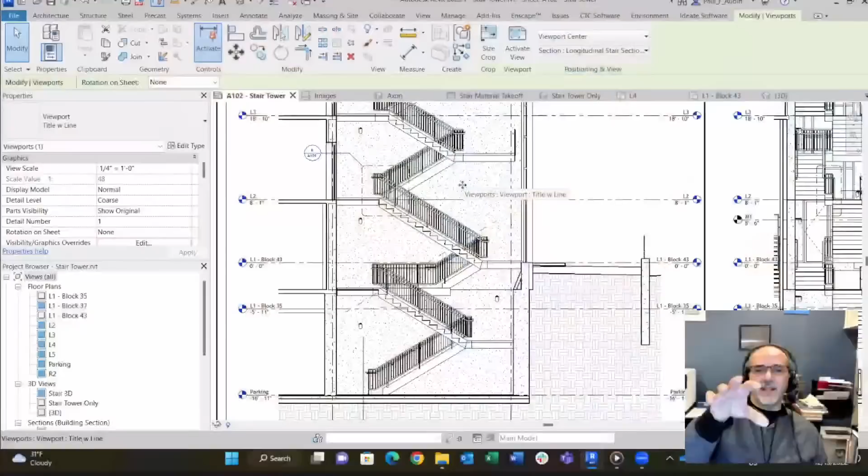Yeah, and with the earlier iterations of this stair tower, there were three stair towers in this building, and they're all similar, but because of the floor to floor height on level 1, they're different enough. I was trying to work on the upper floors that were all the same first, and then copy that stair tower to the other locations. I tried a few different things, but ultimately, these lower levels I ended up just drawing over again as I got more into design development. Just drawing them clean, in situ where they needed to be, and I found that worked best. And the upper floors were behaving and benefiting from the stair tower.

So sometimes you're going to do a little bit of both. Again, don't kill yourself thinking this tool's got to work for this, and if it doesn't, then everything sucks. I mean, if it's working on levels 4 through 50, and it's not working on levels 1 through 4, then do 1 through 4 manually and benefit on 4 through 50. Why not? So great.

Yeah. So I think we should try and get to the example of the sketch custom stair, but I did want to just run through a few of the major tips before we jump in, because what we're saying here is do as much as you can before you convert to sketch, right? And the benefits are what we're showing there: the flexibility, respecting the run. I like that. I'm going to start saying that now.

Respecting the run. But even where you showed, when you're in the component, you grab the run and move it instead of the landing. So many people grab the landing and pull the blue grip, right? Just by you showing that, hopefully people saw that the landing actually adjusted to the runs, and that's key there. And then obviously the railing tip with the supports is awesome. That's going to be a big one for people. So I wanted to just reiterate that.

And now here's an example where you're not going to be able to use the component tool, right? Yeah. So you got to use a sketch. So we can talk a little bit about this one. Now, I know we're running short on time here, so for those that have access to my LinkedIn Learning videos, this and, if we really get time, the other example are both featured in my tip series.

I have a weekly series where I cover anything and everything, and the backstory on this is I walked into a store one day, and like any good Revit geek, I went, how would I build that in Revit? So I pulled out my phone and took some pictures. And when I got back to my hotel or home or wherever, I said, let me try and build this stair.

What's cool about this is two things. I mean, of course you've got the flared bottom, and then it goes in two directions when it gets to the landing. So both of those things are possible. But this is definitely one of those places where you're going to have to convert to sketch-based in order to achieve it.

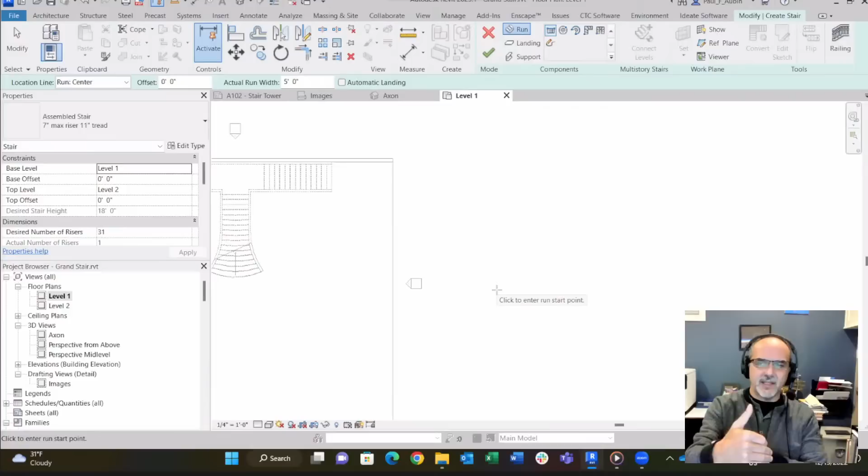Here's the trick here. This time we're going to turn off automatic landing, okay? Because with automatic landing, it's going to try and create the landing the minute you make the second run. And that may or may not be beneficial to you in this case. So I'm going to do about half the risers again. Let's see, that's pretty good there.

And then I'm going to give myself enough room to kind of, do you see how there's like a little hook in the landing here? So I'm just kind of giving enough room there. And because of the scale of this view, the numbers are really small, but now they're even smaller. There we go, right? So you can see there's 1 through 15, 16 through 31 over here.

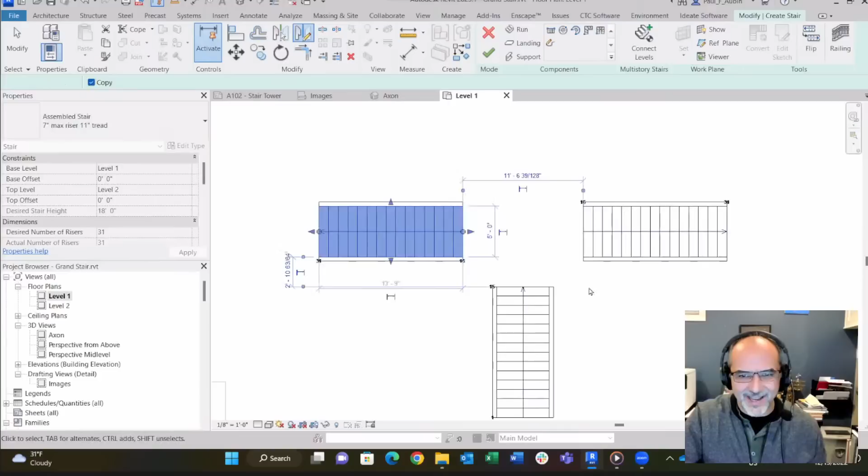Well, here's a really cool thing that you can do, right? You can just mirror this guy, copy it, mirror it, right? Oops. 2023, it remembers what you did last time you did this, right? So I had copy turned off from my mirror tool. Okay. But do you see how that's 16 through 31 and that's 16 through 31? So that's going to give you, like if I switch to the axon here, right? This is it without a landing.

Okay. Now, unfortunately, you can't select three things with the landing. Be cool if you could. But if you go to the landing tool, it's going to prompt you to select the first run and then the second run. So the first run would be this guy, and then I could pick this guy, and I'll get that kind of a landing. If I undo, I can also do this, which is kind of interesting, right? So which one makes more sense?

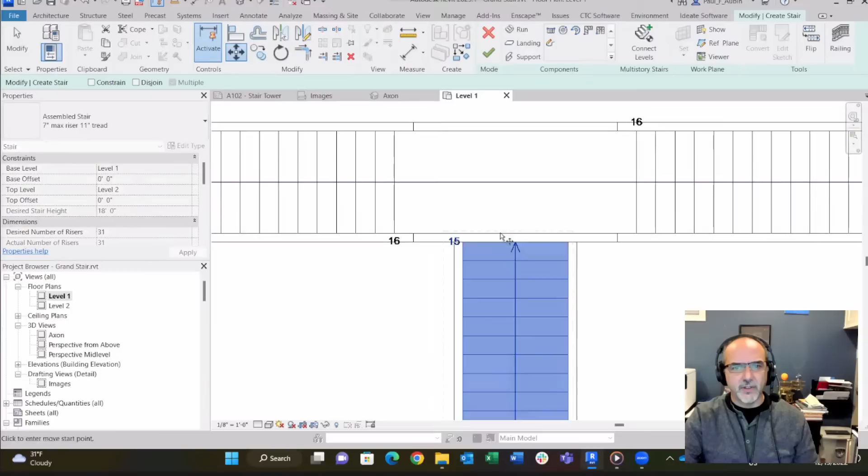Well, I kind of like this because I want to show you this cool little feature. If I take this stair here and I kind of move it in, got to go a little further, it looks like. There we go. Right? You see how it was actually smart enough to cut that right in? And unfortunately, what I'd really like it to be able to do is if I move the run, I'd like the landing to stretch, and it's saying, sorry, no, right?

Now, you could do this and get super close to what we're after, right? And that kind of joined in there. But unfortunately, this corner here, the minute you do that third one in there, I don't know why, but it puts a grip control here and here, but it doesn't put them in any of the other spots where we would like them to be, right? So that means that I don't have a choice now. I've got to convert this to a sketch-based, okay?

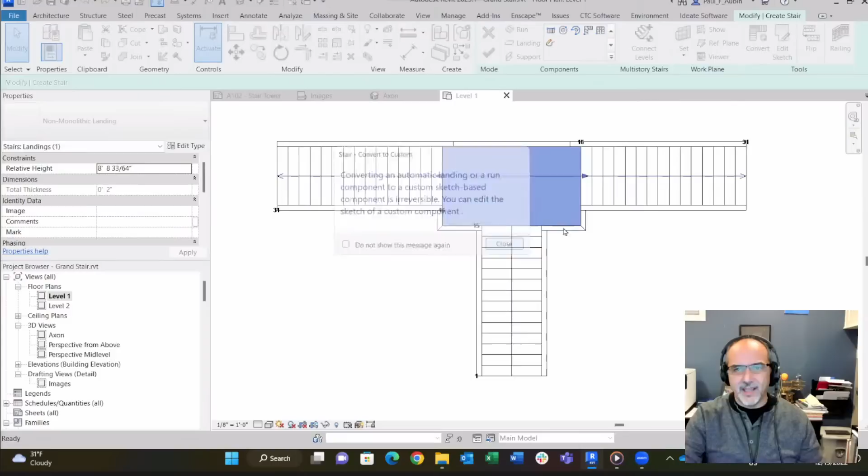And that's just because this design, as you saw from the photographs, calls for this shape like this, right? So if I kind of do this and then just trim it up, I'll just do the one side here. Oh, so I guess those are separate anyway, right? That will give me what I want. But the only way I could figure to get that was to make that a sketch, which kind of stinks, but that's the way it is.

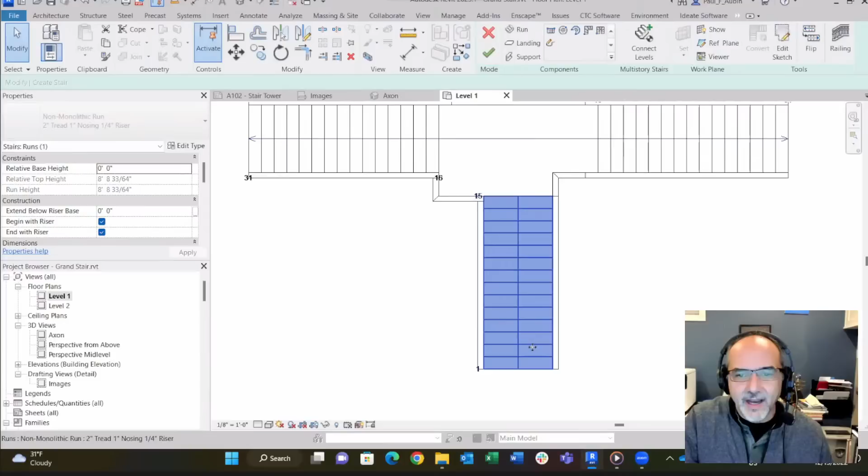Well, obviously it's the same situation with this, right? To get that flared bottom, you've got to convert it. Okay. Then you edit the sketch. And now what I do is I just sort of pull these lines back a little ways. And then I'll go to a tangent arc, which is a really nice tool to kind of give you that.

And I'm eyeballing this, but I'll show you the sketch of the other one. Actually, let me just get the one correct here, and then I'll show you the sketch. I'm going to move that there so it starts clean. But the tangent arc wouldn't work. It would try and tangent off of the riser if you snap it first. Snapped it second. Okay. Then I'll take this and I'll mirror it.

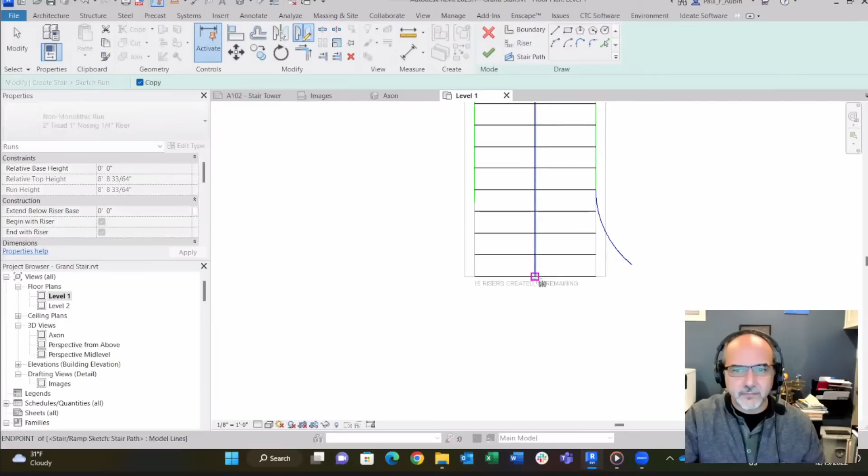And did I get it? No. This is too long. There we go. I think that works now, right? Yep. Okay. And then before I delete these, I'm going to use them as a guide for where the risers need to be, right? I'll just kind of eyeball this for this example. We don't have to make it perfect.

Okay, that one. Make sure keep concentric is off. Oh, anyway, that looks a little ugly, but gets the concept. It's all good. Gets the concept, exactly.

But you can take the boy out of the architecture, but you can't take the architecture out of the boy.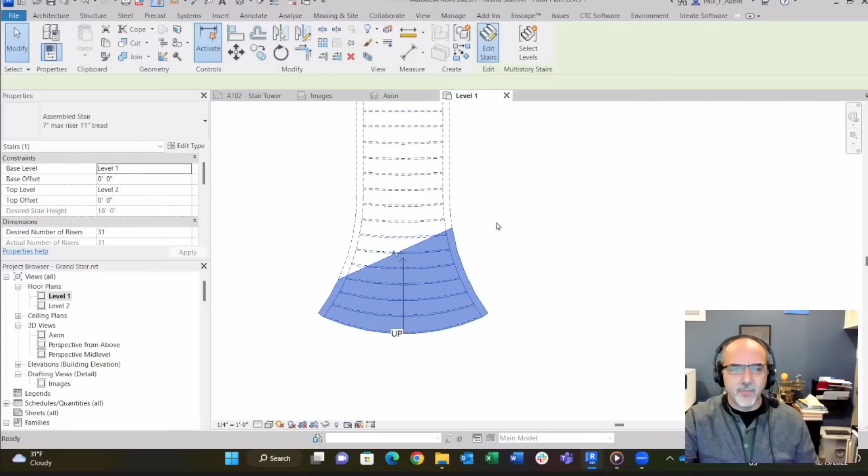I obviously have a gap somewhere. So let me pitch that one and show you the sketch on the other one, which we know worked here. So I'll cancel that stair, and then we'll come over here and select this one, which I spent a little bit more time on just to get it a little nicer. Here you can see I even added some reference planes to help me out, and you can use dimensions and whatever you want to do. But then these lines, I was a little more careful. I even set them to real radii instead of just eyeballing them, so you can do all of that stuff.

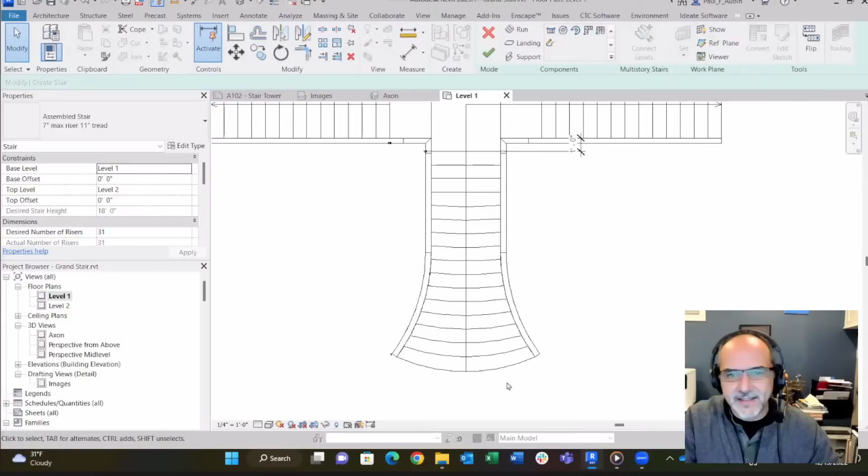But then you have to have exactly 2 continuous boundaries in green, and then obviously the right number of risers. The error I was getting, I must have had an overlap or a gap somewhere, and that's what was causing it. But anyway, that's a custom-shaped stair now. And then I did create a really rough railing in this file. So, am I still in Sketch here?

Cancel out of there. So while you're looking for that, the one thing I did want to point out is, even in the other example, you didn't convert the entire stair to sketch. You only converted what you needed to. And almost every time I see someone convert to sketch, they're converting the entire stair to a sketch. Yeah, it's not necessary. So that's a great tip to take away there. A landing is a perfect example where you may have to have funky landings to make it work, but you don't have to convert the risers or the runs to a sketch, which is pretty cool.

Right. So I'm just using the railing tool here, and I'll just do place on stair and ramp. And I don't know what that error said because I don't care. But I got almost all the way there. That's pretty close. It looks good. Yeah, I was too lazy to do the fleur-de-lis at the top here, right? But that would just be a simple little family that you would just put on the top of your balusters.

And is that a baluster or is that a support family? I think these are balusters because you see they're not continuing past the extension, but they could be supports. If I wanted them to continue past the extension, or if you just like supports better, there's no reason not to do them as supports. But I think these are just balusters. Yeah. I think the reason I did balusters, the one advantage, is that offset pattern that's going on.

You see how it goes: a tall one, a short one, a tall one, a short one. You can't do that with supports. I don't even know if you could, because you would have to try and build the pattern into the support, and then it wouldn't follow the slope. It would be awful. Yeah. So these have got to be balusters. But that's a really nice feature of balusters. It would just be nice if, I mean, look, the baluster technology hasn't changed in 20 years. No. It would just be nice if it got a little bit of love, you know?

Yeah. So you wouldn't have to make what you just showed there in the baluster settings with the 17 balusters at 4 inches. Oh, that dialogue. The dialogue's crazy, but hey, it works. And look at this; it followed the custom landing. Yeah, no, it did pretty good. Some adjustment on the posts and the sketch, and you're close. That's really close. Yeah, if you've got to go sketch based, you've got to go.

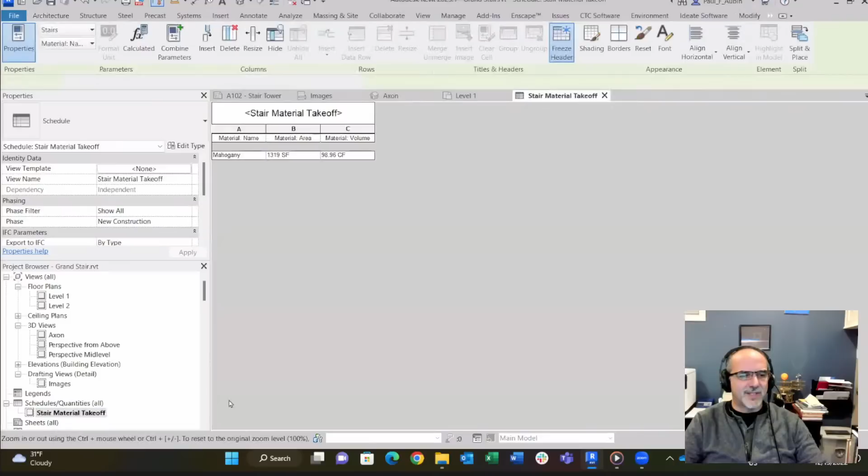Now, I know in the chat when we first started, somebody was asking about quantities, and Jeff and I, before we turned on the call, said, I'm not sure, and so I threw out a quick material takeoff in here, and I have no idea if this number is even remotely close. This is the volume and the area of the mahogany material that I've got applied to this stair. And obviously it's including both the landings and the stairs.

So could we get it down to the individual components? This is how much you have on the treads, this is how much you have on the risers. I'm not sure. If they were different materials, you could. If they're the same material, you'd probably have to put some other distinguishing mark in there that the material takeoff could tap into. But as long as there's a parameter that you can separate your schedule on. Right now I applied the same mahogany to the supports, the treads, the risers, the landing. So I'm just getting one line item, right?

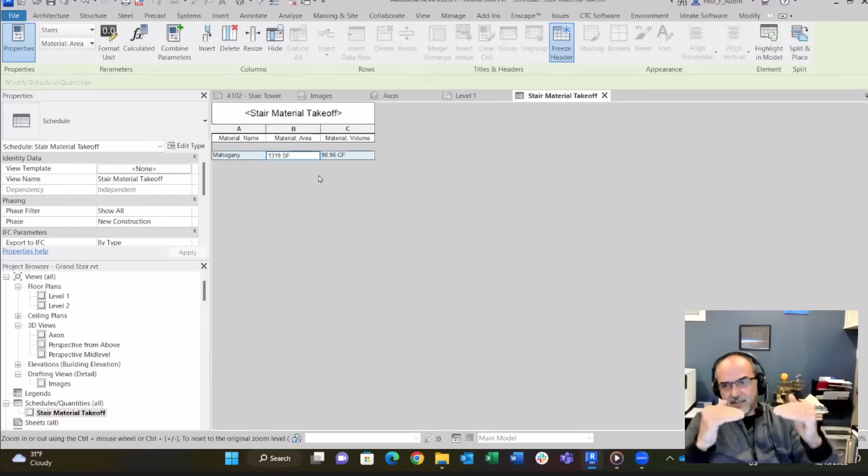But if I had supports as one material and treads as another and risers as another and landings as another, I'd be getting differentiation there. And it might be really close to what you're looking for. So I didn't dive into the person's question. I don't know what they were trying to achieve, but a material takeoff is the first thing I would suggest exploring on that. So awesome.

So one last one. I'm just curious, and it could easily just be you haven't gone down this road exploring it, but glass railings. Well, it's funny you should ask that. I don't know if you have an example, but there was a question, and if not, we can follow up on Twitter with some thoughts. I know that's always a question, and I've seen some extremely unique approaches to it, and I'm personally curious how you've attached it. So maybe we'll just follow up on Twitter with some examples. I'm gonna fumble around if I try and find the file. Yeah, it's all good.

That same client, we had that very discussion. And what we decided to do was again forego the posts. If we forego the posts, we solved most of the problems that people hate about glass railings. And the only thing we didn't get was the regular posts, which are never really regular anyway, right? Because you always have some strange little condition at the corner. So what we did was use a railing with a long, thin profile. And you'd be surprised how close it gets. Because it follows the slope, it turns the corner, it goes flat when it needs to, then it follows the slope again.

It's this one continuous piece of geometry that you just assign to glass, but you're not getting the expression of the individual panels of glass. Now, you could also add balusters to break that up a little bit and get closer. We chose not to in the example that we built, but you certainly could. But again, I try to find that middle ground. What's going to get me my eighth, quarter, and half-inch plan sections and details really close, and then I only have to supplement a little bit.

And then for the large-scale details, I'm fine with doing more work there because I'm only going to show a few of those. I'm not going to show every single condition in a large-scale detail. You're going to show a typical transition at a landing, a typical railing condition, a typical nosing condition and things like that, right? So you're going to create those conditions and choose the best ones to showcase that. And if you have to do more drafting in those views, so be it.

But for the model itself, for the overall, I think you can get really close by just doing a handrail that is a long, thin rectangle. Looks like a piece of glass, and that's exactly how I've approached it too. I was curious to see if you had any other thoughts, but in my experience, that's been the best too. But the same rules apply as with the railing, where the geometry.

I mean, Revit's going to try, but if you're going to try and make a turn like that first stair example you showed, and you're going to try and have this profile do it, well, that profile probably can't do that in the real world, which is why it's blowing up. Balusters are just going to give up at those corners. Yes, see, that's why you get all those empty gaps, right? Yeah, a baluster is not going to bend.

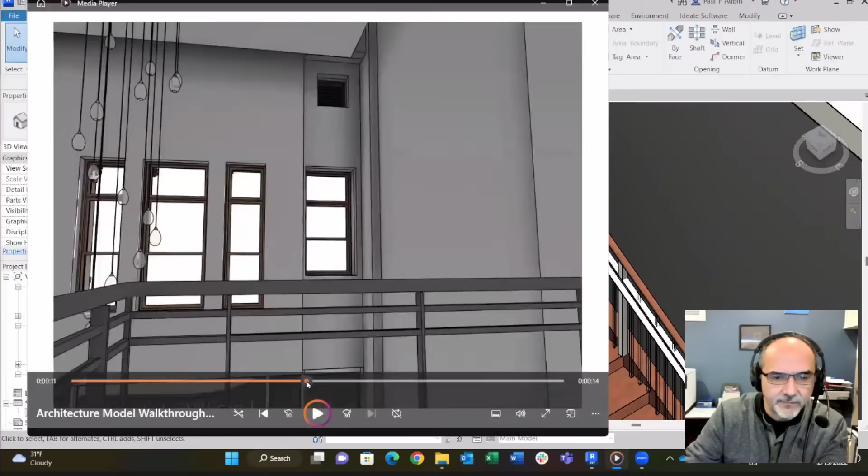But if you're going to do this in Enscape and you need to see the individual glass panels and you really want to see exactly the way it's going to look, then you're just going to have to build that stair. In fact, this stair back here, this part right here, because it's a middle support, middle supports won't go under the landing, I found. So this part right here is an in-place family.

So sometimes, if you just can't, that's a perfect place for an in-place family because it's got to match the stair. It's a one-off condition. That's exactly what in-place families were designed for. And I just made it look like the support. Okay. The only other alternative is to build the whole stinking stair in the family editor, which you can do, but it's just way more work. Yeah. So I'm not sure that it would have been worth it.

Right. So again, I'm always looking for that compromise. How can I leverage the tool as far as I can take it? And then I'll go the last mile, as it were, using other techniques, going a little bit manual. Right. Awesome. And I know we are out of time for sure, but there's one last little tiny tip I want to give people. No problem. Go ahead, man. I felt pretty clever about this one.

This is actually an adaptive component. Now, there's only one reason, though. Okay? So this is that same client. This is our escalator family. And here's why. Do you see what the treads are doing? You see how they kind of sink into the floor as they go down? Okay. I couldn't think of any other way to do this. This is a repeated path. I don't know how many levels deep I'd have to edit into this family. It's at least one or two.

But somewhere in here, let's see if it's in here. It might be right at the top level. Oh, yeah, look, there's repeater. So reference lines, reference points, and repeater. Let's isolate those. Okay. I probably didn't want the repeaters. Let's hide that. Ah, crap. Okay, so the path isn't there, so that's probably one level deeper or something. But the path starts flat, it curves. You can kind of see it there. Yep. It curves and then it goes straight and then it curves again.

A divided path can go across multiple segments. We don't have a polyline in Revit, right? So if you try to follow a path like that, a divided path is the only thing that I know of in Revit that'll do that, where even though you've got 5 separate segments there, it'll let you space your points along those 5 separate segments correctly, and then you just repeat your treads along there, and they just naturally do. So the rest of the geometry is just standard family stuff. I didn't need an adaptive component for any other reason, but I went adaptive component because I needed the repeater for the steps themselves.

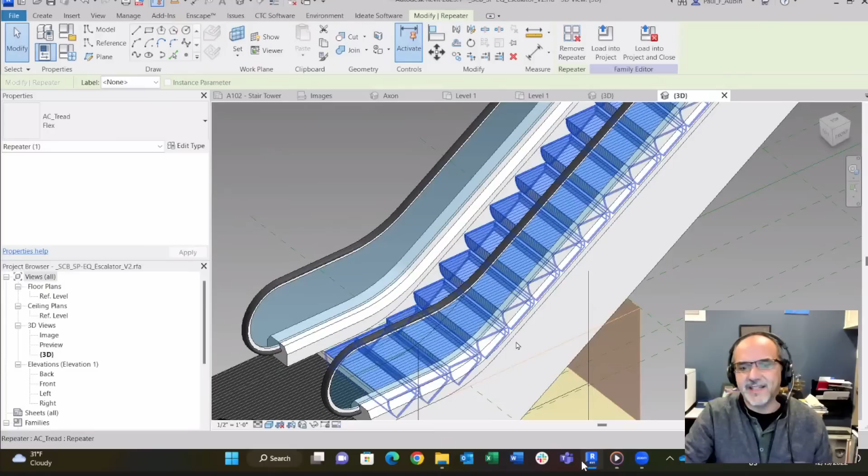So anyway, sometimes you do go there. So again, I don't want to leave people with the idea of don't ever do any of these other ideas. I just like to exhaust the other possibilities first before I get there. No, but I do think there's a lot of validity and value to the idea of getting as much as you can out of that component based stair.

I mean honestly, until you just showed me some of this, I remember when the components came in, whatever year that was, 13, 14, I don't even know, when we went away from just the sketch and we had the component piece, until now I just haven't thought about how much value there was in trying to keep that a component.

I think, especially those of us who used stairs before the component existed, our minds were always trained for the green and black lines, and that's where we're comfortable. But with the flexibility, you're getting the best of the parametric value of Revit when the rails, the stair, everything stays as components with each other, because they know how to interact with each other. Exactly. But sometimes they don't, right?

And that's why I'm saying, the biggest downfall of the workarounds is that you lose that adaptability, that interaction. There were a couple comments in the chat about using curtain walls, using different things, and they work, right? All of that works. They work, but you do lose some of those benefits that we're talking about. Then you've got a stair that's a curtain wall, and it's going to misbehave in those ways.